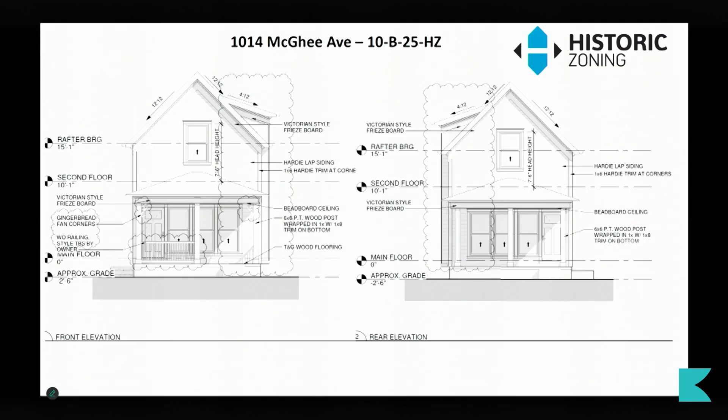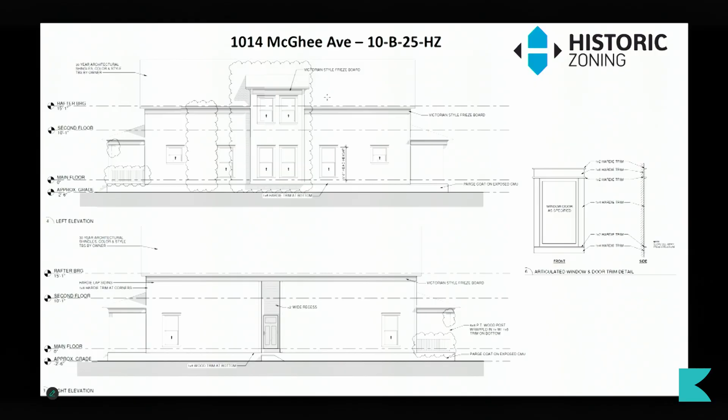Our first case today is for a new 2-story duplex on a 25-foot wide lot on McGhee Avenue in Mechanicsville. The shotgun-style duplex has porches on the front and rear elevations that serve as entrances to each unit. I want to note that what is labeled as the left elevation on the plans is actually the right side of the building if you were looking at it from the front, but I will use the labels on the plans for this discussion. This case was postponed at the October meeting to allow the applicant to revise the plans, particularly the left/west elevation. The siding-clad faux chimney on the left/west elevation has been removed, and the shed roof massing has been revised to a 2-story projection. The front setback was increased by 4 feet, and Victorian-style decorative brackets were added to the corners of the 2 front porch posts.

This is a middle housing project which must follow additional design standards, and a review occurs during permitting. The Commission's review focuses on how the project meets the design guidelines, but some elements of middle housing review may trigger site plan and building elevation revisions that would require additional review by the Commission.

The 25-foot wide lot previously featured a single-story, modest folk Victorian-style shotgun house with a width, depth, form, and roofline comparable to the proposed duplex. Its form and proportions are appropriate for the relatively modest housing stock along the block, and the Victorian-style porch brackets and friezeboard contribute detail compatible with the historic architecture.

However, as recommended by the guidelines, new construction in the overlay in the last 20 years has been more elaborate in style and detail, including recent new construction on Cansler Avenue, a block with similar housing stock.

The average setback of the block face is 24 feet 5 inches. The adjacent house is the closest to the front lot line along the block face and features a 16-foot setback, with the front porch at 10 feet.

It should be noted that there is likely a discrepancy in the lot boundaries in KGIS that resulted in an average front setback calculation approximately 5 feet larger than the actual measurements, which can be rectified during permitting.

The proposed 19.5-foot front setback with the front porch at 11.5 feet aligns with the block face and is appropriate. You can see the site plan overlaid here for that.

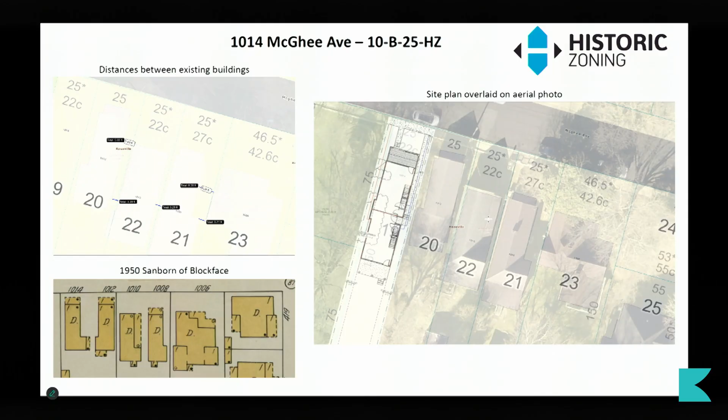The duplex is proposed to be centered between the side lot lines with a 4-foot side setback for both sides of the main body of the house, and a 3-foot side setback on the left-west elevation for the 2-story massing.

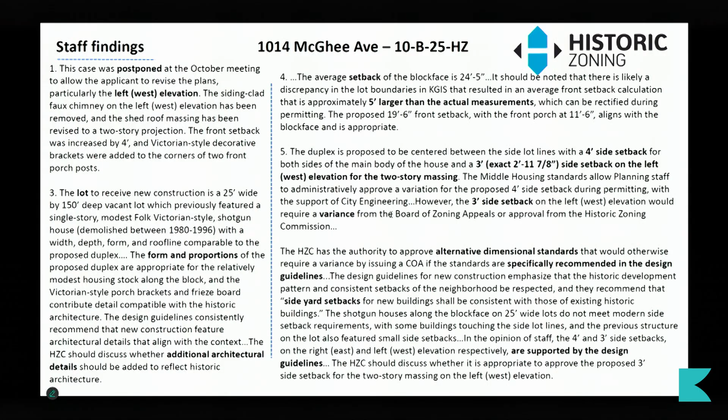The middle housing standards allow planning staff to administratively approve a variation for the proposed 4-foot side setback during permitting, with the support of city engineering.

However, the 3-foot side setback on the left elevation would require a variance from the Board of Zoning Appeals or approval from the Historic Zoning Commission. The Commission has the authority to approve alternative dimensional standards that would otherwise require a variance by issuing a COA if the standards are specifically recommended in the design guidelines.

The design guidelines for new construction emphasize that the historic development pattern and consistent setbacks of the neighborhood be respected, and they recommend that side yard setbacks for new buildings shall be consistent with those of existing historic buildings.

The shotgun houses along the block face on these 25-foot wide lots do not meet modern setback requirements, with some buildings even touching the side lot lines, and the previous structure on the lot also featured small side setbacks.

The left-west lot line is shared with the old Mechanicsville Park, which reduces concern about the effect of a smaller side setback, but makes this elevation highly visible.

In the opinion of staff, the 4-foot and 3-foot side setbacks on the right and left elevation respectively are supported by the guidelines. In the opinion of city engineering and zoning, the reduced setbacks would not pose a safety issue, although a higher rated firewall may be required to meet building codes.

The Commission should discuss whether it is appropriate to approve the proposed 3-foot side setback for the 2-story massing on the left elevation.

Guidelines recommend avoiding new construction that varies in height, so that new buildings are equal to the average height of existing buildings. The block features 1-story houses, so the duplex would be the only 2-story building on the block.

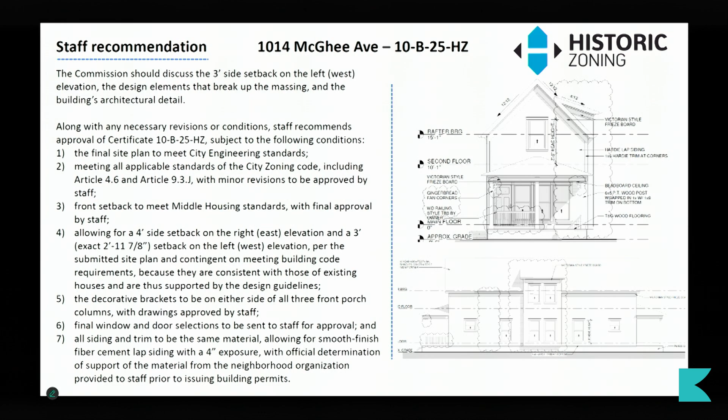Any context with that, Melinda? Context for changing the setbacks, the side setback specifically? Yeah. So section 8.5C of the zoning code allows the Historic Zoning Commission to use alternative dimensional standards if they are specifically recommended by the design guidelines.

The design guidelines do speak to side setbacks. One second, let me find where I have this written down. The design guidelines for new construction emphasize that the historic development pattern and consistent setbacks of the neighborhood be respected, and they recommend that, quote, side yard setbacks for new buildings shall be consistent with those of existing historic buildings.

So as you can see here, the historic buildings here are not meeting the 5-foot setback requirements. You can see that on this old Sanborn as well. And so in the opinion of staff, the design guidelines do specifically speak to this, and the historic context of the block speaks to this as well. The spacing between these buildings is very small, like 3 foot between these two. So having that spacing would be consistent with the block, and the side that'll have the smaller side setback is touching the old Mechanicsville Park, so there's less concern about neighbors there.

Again, as I mentioned, this is a middle housing project, so 4-foot side setbacks could be approved during permitting by planning staff with the support of engineering if the commission was uncomfortable with approving those setbacks. There was discussion at the last meeting, though, that this 3-foot side setback would be necessary to make this massing a 2-story projection. Previously, it was flush with the building, and there was a faux chimney here that the commission requested be removed. They've removed that and made this massing.

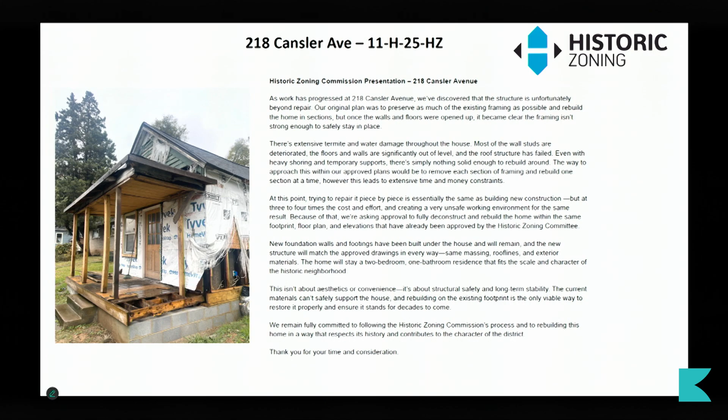According to the project's contractor, the damaged structure is currently a safety hazard that puts workers at risk, and pictures documenting water and termite damage were provided.

The guidelines state that demolition of any original feature or part of a historic building should be avoided, and that demolition of any building which contributes to the historic or architectural significance of the Old Mechanicsville neighborhood should not occur unless public health and safety require the removal of the building or structure.

In the opinion of staff, the documentation demonstrates that the structure is a safety hazard, and deconstruction and reconstruction following the plans approved with 11-D-24-HZ is appropriate.

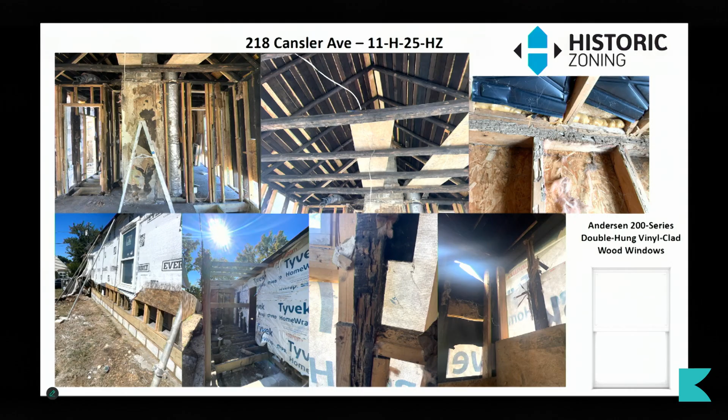However, no mechanical demolition, to include the use of excavators, wrecking balls, or bulldozers, should be undertaken, but mechanical equipment can still be used to disassemble the structure. Every effort should be made to reuse any salvageable historic materials, in particular the timbers that frame the roof.

Any other deviations from 11-D-24-HZ will require additional review by the Commission.

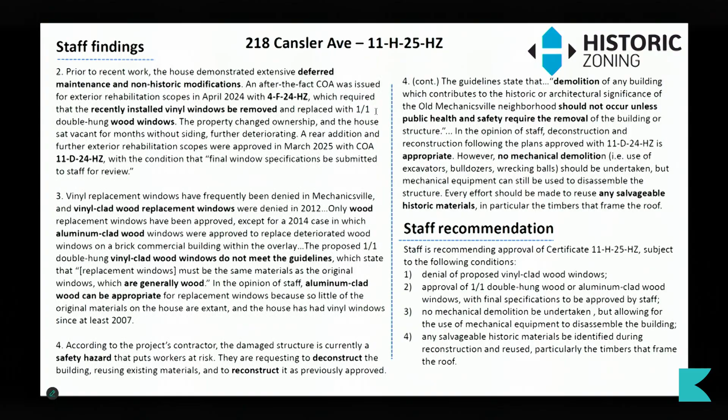Staff is recommending approval of Certificate 11-H-25-HZ subject to the following conditions: denial of the proposed vinyl-clad wood windows, approval of 1/1 double-hung wood or aluminum-clad wood windows with final specifications to be approved by staff, no mechanical demolition be undertaken but allowing for the use of mechanical equipment to disassemble the building, and any salvageable materials be identified during reconstruction and reused, particularly the timbers that frame the roof.

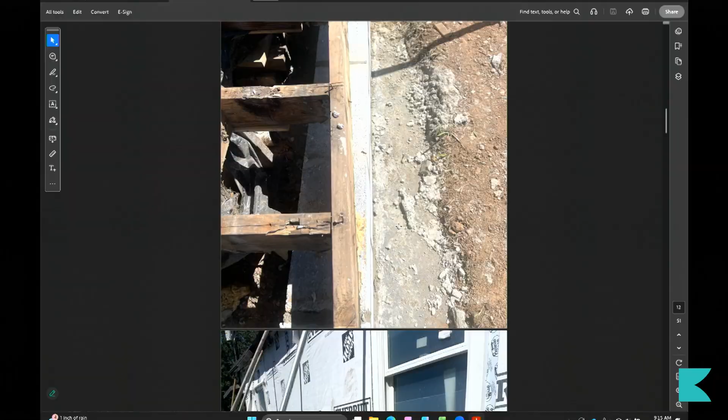What I was going to say back on the conversation of framing is all the old lumber has been there, but it's all balloon framed, with nothing attached at the bottom, which is why we had to add a lot of the lumber around the foundation just to be able to jack up the house. So that's all new for the most part. And then the newer framing that you see, when Corey purchased it, some contractor came in here and clad all of this. There's brand new drywall, brand new flooring, everything.

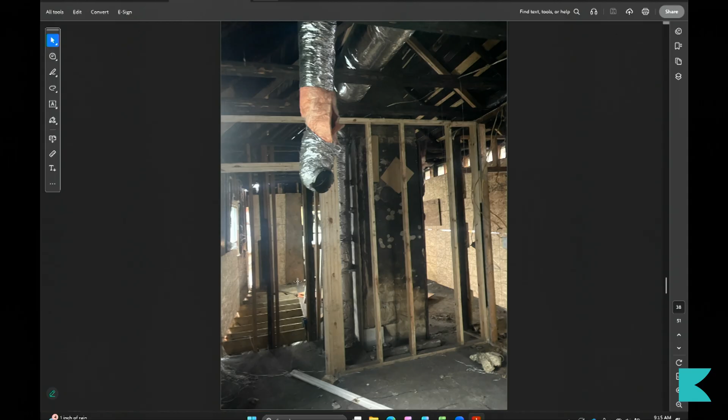We just ripped it off. So everything that's exposed, that newer looking framing, is something that they did, but it's so out of level that the ceilings look like this. So I just wanted to contribute back to the framing conversation so you have the context on that. So all that is what the previous contractor had done that we've just uncovered.

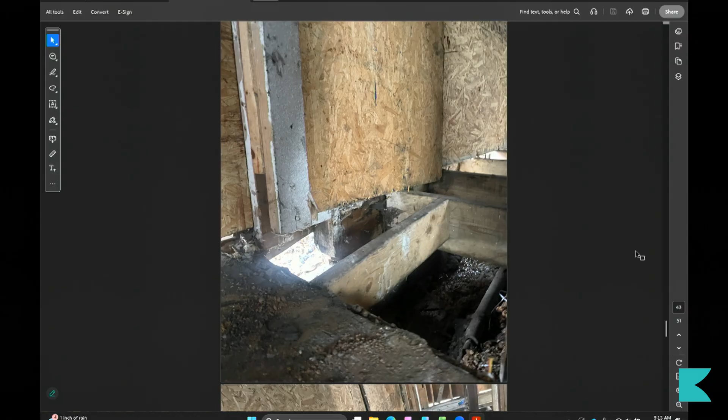Can you repeat the next question that you had? Yeah, I wanted to know if you were going to retain the band board and floor joists and studs that we can see that look a little newer, or is that part of the...

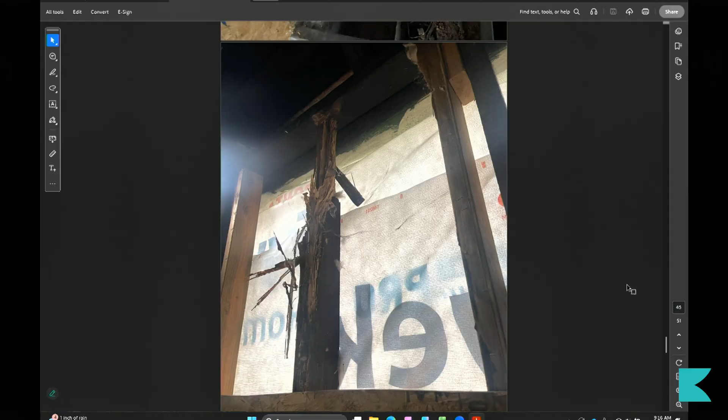So the two worst parts of the framing of this are: the termite damage in the old lumber is so bad that you can take the walls and do this to them, and they're not actually attached to anything, which is why the guys who did the foundation added a little bit of lumber just to be able to lift up the house to build the footers and walls.

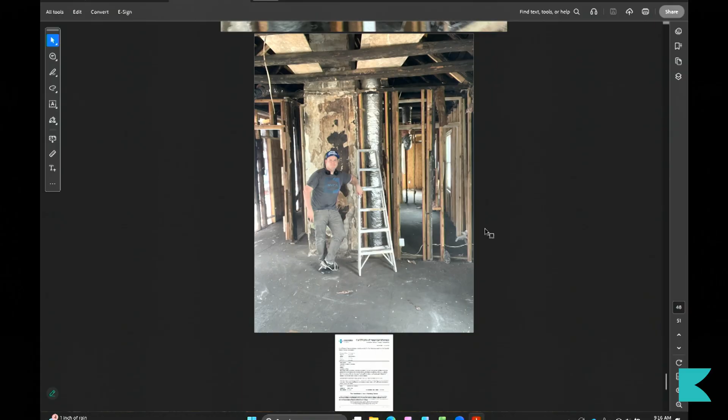And then the newer framing from the previous contractor, which is kind of the stuff that you see there where it looks like it's a few years old, but it's been aged by weather, it's not worse than the old lumber, but nothing that they have done is straight. It's not done properly. It's not holding anything up. It's not attaching - it's on the subfloor and it's not actually tying into anything. So none of it is right, and everything is out of level.

So for this to be structurally sound, the original plan based on what had been approved was to disassemble one wall at a time and rebuild it properly, which is the exact same thing as new construction, but just doing it one piece at a time, which is a lot more dangerous and cost prohibitive. So the goal is not to save any of the framing that the previous contractor did because it's all wrong. If we can save anything, the timbers in the roof are the strongest. The wall framing is not strong at all.

It has termite damage really badly. That's newer lumber that also has termite damage, which will not be saved. So the strongest component of this house that remains is the timbers in the roof. However, nothing's level, so the whole roof is really wavy, which has caused the whole back of the roof to be falling in. So any way that we can save those, if you guys have recommendations of how they can be repurposed or a way that still provides suitable housing, even if they're not visible, I think we'd be open to understanding how you see those being reused in the house.

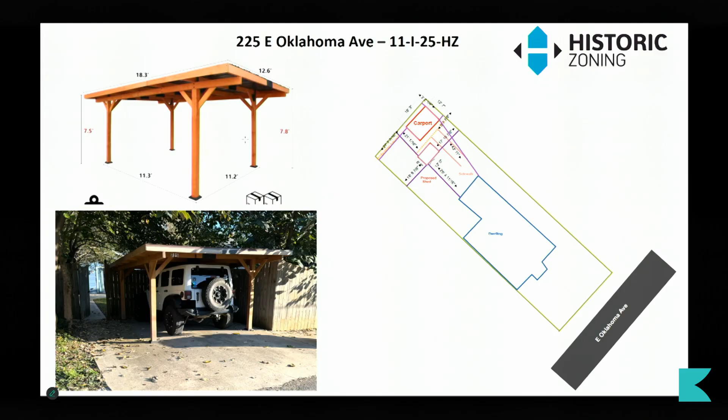This case is for an after-the-fact review of a new secondary structure. A shed was approved on the property last month, and it was identified during permitting that this carport was built without a permit or a COA sometime in 2024. The carport is placed at the rear of the lot and is accessed via the alley, and it is made from thick pine posts with brackets and a flat metal roof. The carport is not visible at all from the right-of-way and is screened by a fence.

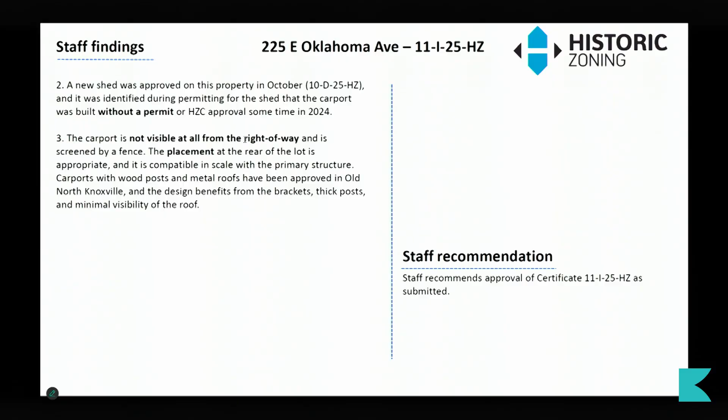The placement at the rear of the lot is appropriate, and it is compatible in scale with the primary structure. Carports with wood posts and metal roofs have been approved in Old North Knoxville, and the design benefits from the brackets, thick posts, and minimal visibility of the roof. So with that, staff is recommending approval of Certificate 11-I-25-HZ as submitted.

Thank you. I think the applicant is on Zoom, maybe?

Hello, my name is Fatima Al-Azhari at 2701 Eugenia Avenue, Nashville, Tennessee, 37211. I have nothing to add.

Okay, thank you. I think we have the neighborhood rep also on Zoom. Would you like to make a comment? Yes, Sean Boland, 115 East Scott Avenue, representing Old North Knoxville.

So carports are not allowed per our guidelines, and I'm unaware of any carport that's been approved. When approaching the board, we all agree that we would never have supported this to begin with. That being said, it is not visible from the public right-of-way at all. We are hesitant to support anything that deviates from our guidelines, especially when they can be perceived as precedent setting. So we do not support this application, but we are hesitant to recommend or request its removal. I'm happy to answer any of your questions because I was somewhat vague there.

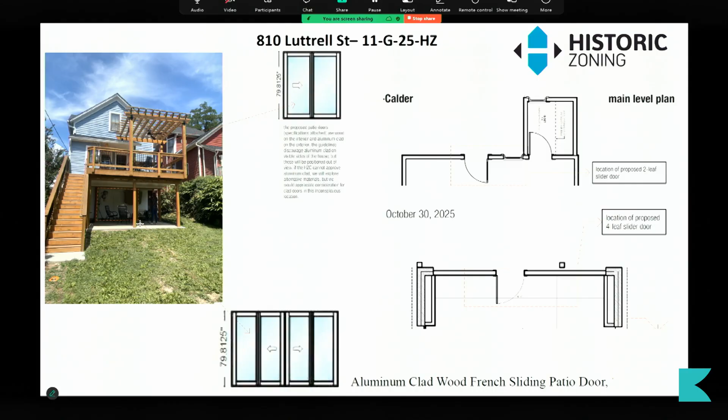Our first case in 4th and Gill is for 2 door replacements on the rear elevation. 2 existing single doors will be removed and replaced with aluminum-clad wood sliding full-light doors with 4-leaf and 2-leaf profiles on the 1st and 2nd story, respectively. Repairs to the brick foundation and installation of foundation drains were approved administratively on November 6th. The existing doors on the rear elevation are simple and not original to the structure, although their location might be. Removal is appropriate. The existing openings will be widened to allow for the doors, and in-kind wood trim to the existing should be installed around the openings.

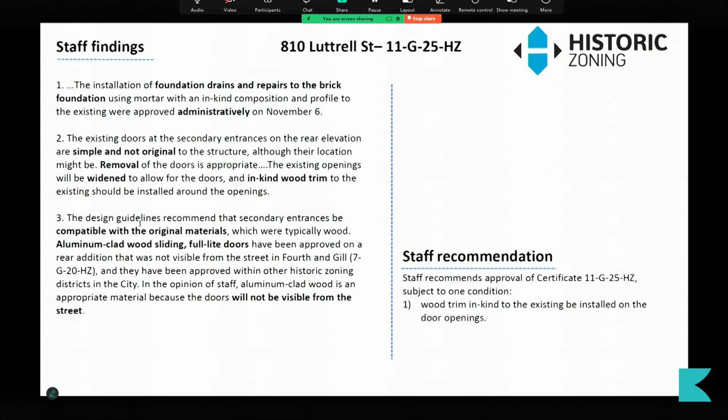The design guidelines recommend that secondary entrances be compatible with the original materials, which were typically wood. Aluminum-clad wood sliding full-light doors have been approved on a rear addition not visible from the street in 4th and Gill, and they've been approved within other historic zoning districts in the city. In the opinion of staff, aluminum-clad wood is appropriate because the doors won't be visible from the street. Staff is recommending approval of Certificate 11-G-25-HZ, subject to the condition that wood trim in kind to the existing be installed on the door openings.

Thank you. We have the applicant before us. Could you say your name and address, and let us know if you have any comments based on the staff recommendation? Yes, Sarah Martin, 800 Luttrell Street.

I agree with the staff recommendation about replicating the casing. The door casing will be the same profile that we have on existing openings on the back of the house, so that will match. With regards to the aluminum clad, we don't typically propose that in this neighborhood because we prefer a paintable substrate, either fiberglass clad or wood. But the reason we did propose it here is because it's a pretty big cost difference for the owner, a savings compared to other materials given the size of the doors. And since much of the trim on the house is white and aluminum clad comes in several options of white, we thought it would be a good match for this particular house.

Is the neighborhood rep available, or did they leave any comments? I did not receive any comments, and I don't believe they are here. Okay, commissioners, did you have any questions or concerns?

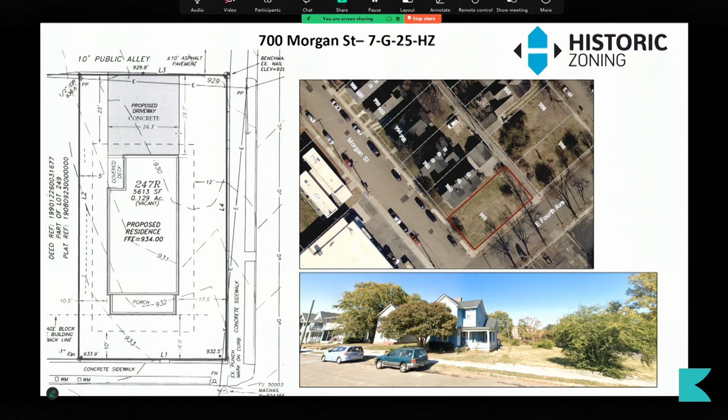The proposed parking is a concrete pad at the rear of the lot, accessed via the alley, which meets the guidelines. The 26-foot wide by 57.5-foot deep 2-story house is proposed for a block featuring 2-story houses in vernacular, Queen Anne, and Craftsman styles. The opposite side of the street features a historic brick apartment building, contemporary new construction, and a cinder block commercial building outside of the overlay.

The proposed 2-story house employs the American four-square style, including typical roof forms, brick veneer cladding, and a 3-bay facade. Overall, the house's style is compatible with the context and uses contemporary materials to be sufficiently differentiated from original buildings. However, additional architectural details and elaborations may be necessary on the side and rear elevations to align with the context.

The proposed 8/12 pitch hipped roof with a hipped roof dormer on the facade and overhanging eaves is comparable in height and complexity to other houses on the street. The roofing material is not specified but appears to be asphalt shingles and should be indicated on the final drawings.

The facade features a full-length wraparound 6-foot-8 deep front porch with 8-inch square columns, accessed via full-length brick steps. The wraparound porch is similar to that of the previous structure on the site and provides additional interest to the right elevation. The tongue and groove flooring is appropriate, and the final drawing should include a hand railing if required by code, ideally a wood hand railing with balusters set in the top and bottom rails.

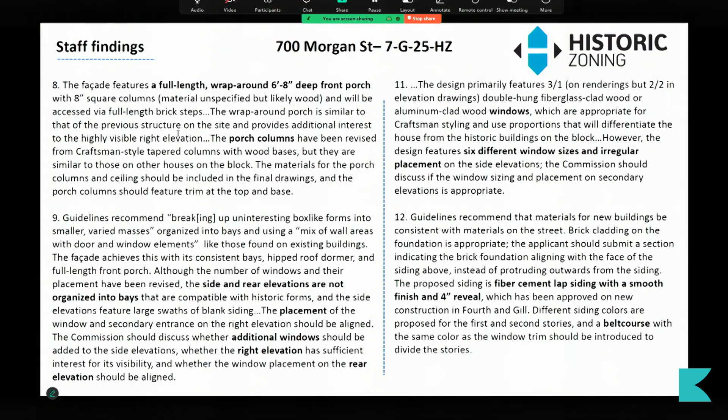The porch columns have been revised from the previous Craftsman style tapered columns with wood bases, but are similar to other houses on the block. The materials for the porch columns and ceilings should be included in the final drawings, and the porch columns should feature trim at the top and base as depicted.

Guidelines recommend that materials for new buildings be consistent with the materials on the street. Brick cladding on the foundation is appropriate. The applicant should submit a section indicating that the foundation aligns with the face of the siding above instead of protruding outwards, with final drawings showing foundation height.

The proposed siding is fiber cement lap siding with a smooth finish and 4-inch reveal, which has been approved on new construction in Fourth and Gill. Different siding colors are proposed for the first and second stories, and a belt course with the same color as the window trim should be introduced to divide the stories.

The proposed quarter-light Craftsman-style wooden front door is appropriate. Final door selections for the full-light secondary entrances should be sent to staff for review.

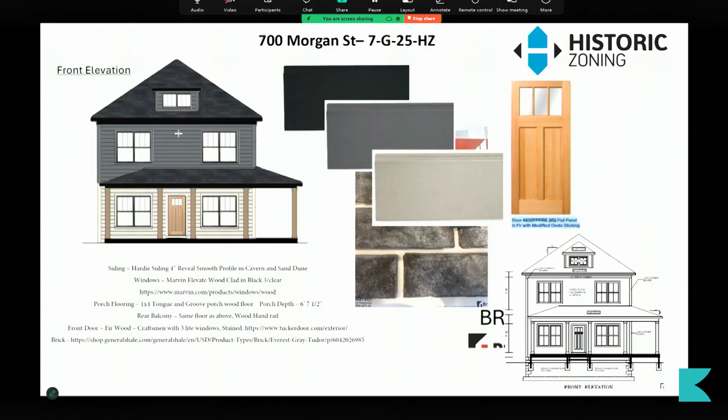Guidelines recommend breaking up uninteresting box-like forms into smaller varied masses organized into bays, using a mix of wall areas with door and window elements like those found on existing buildings. The facade achieves this with its consistent bays, hipped roof dormer, and full-length front porch. Although the number of windows and their placement has been revised, the side and rear elevations are not organized into bays compatible with historic forms, and the side elevations feature large swaths of blank siding.

The placement of the window and secondary entrance on the right elevation should be aligned. The design primarily features 3/1 double-hung fiberglass-clad wood or aluminum-clad wood windows, which are appropriate for Craftsman styling. However, 6 different window sizes are proposed.

The Commission should discuss the front and corner side setbacks, window placement and sizing on the side and rear elevations, and whether additional detail is necessary on the side elevations.

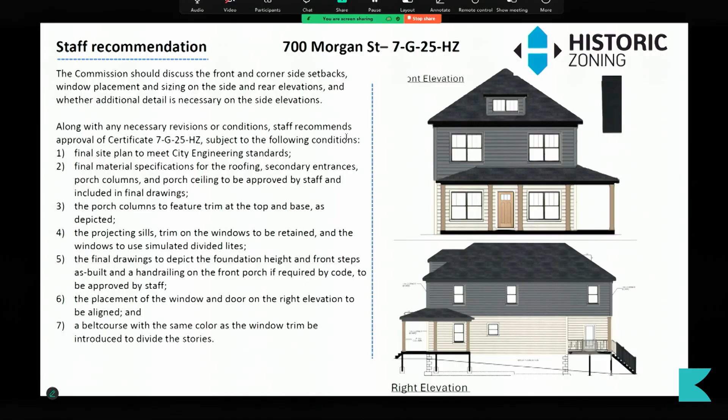Along with any necessary revisions or conditions, staff is recommending approval of Certificate 7G25HZ, subject to the following conditions: the final site plan to meet city engineering standards; final material specifications for the roofing, secondary entrances, porch columns, and porch ceiling to be approved by staff and included in final drawings; the porch columns to feature trim at the top and base as depicted; the projecting sills trim on the windows to be retained, and the windows to use simulated divided lites; the final drawings to depict the foundation height and front steps as built, and a hand railing on the front porch if required by code to be approved by staff; the placement of the window and door on the right elevation to be aligned; and a belt course with the same color as the window trim to be introduced to divide the stories. Thank you, Melinda.

Zach Taylor, 12404 Hickory Creek Road. I would like to say the site plan - our surveyor and engineer is still working on that to get it correct, because it doesn't have the wraparound porch. So with those setbacks, we will have to scoot the house over to get that where the side porch goes out around 8 feet.

We'll have to kind of make that up so we're within the setback lines for building purposes. The house is going to be flipped, so the covered deck will be on the street side and not beside the neighbors. Did you have any other comments based on staff recommendation? No.

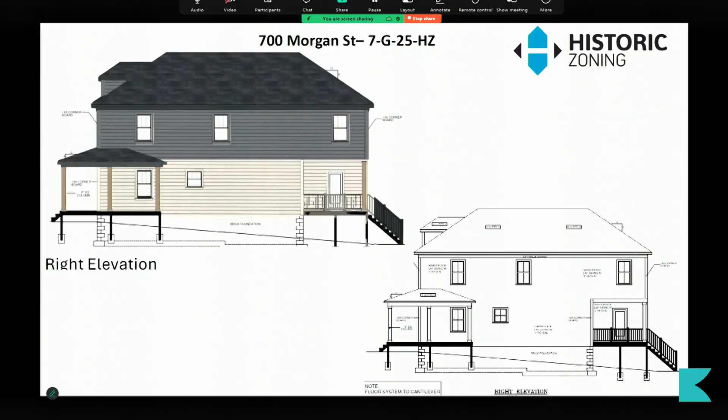Thank you. You don't have a specific dimension, 5, 6 feet, 4 feet? Are you proposing a handrail for the front porch? I think the lot falls approximately 4 feet over the elevation distance of the home. The front porch will be within the 30-inch range, which would not require handrails. The back, a little inset porch, will be at an elevation that will require handrails. So the stairs and the banister railing along the deck will require handrail. Thanks, I appreciate that. Yes, sir.

Absolutely. Commissioners, feel free to correct me if I'm wrong about the prescription of color—we certainly can't tell you what color to paint the door, even if y'all have a preference. I would agree, because as a design element it can be changed very easily, and we're looking at the long term.

The design guidelines recommend that the materials used for new buildings be consistent with existing historic building materials along the street. It's common that when people use masonry, we request they send specifications for us to review, just to make sure it's not super thin, to ensure it's still going to look historic.

That to some extent does give y'all purview over the type of brick, to ensure it's consistent with the street. So if in y'all's opinion consistent with the street means something more clay-based, that could be added as a condition. But the siding color, for example, isn't really within y'all's purview.

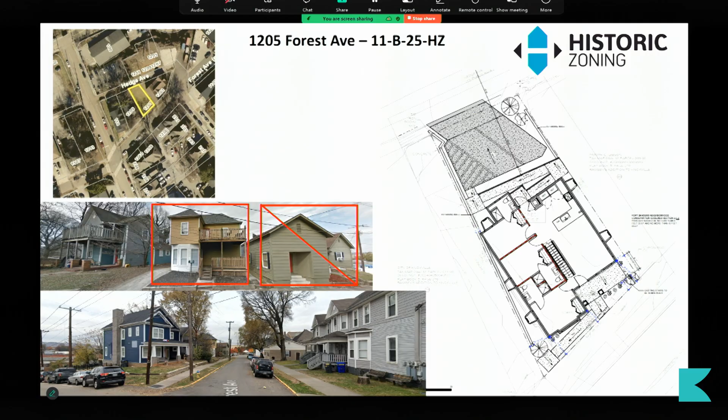That would be made from, quote, concrete. Design guidelines discourage the use of cinder block and encourage that retaining walls be made from, quote, low square cut stone, poured concrete, or brick. The retaining wall should be made from poured concrete or be finished with another recommended material.

The cross gable roof features an 8/12 pitch side gable and a 17/12 pitch front gable. The form, pitch, and complexity align with the design guidelines.

Guidelines recommend that new construction, quote, provide porches with proportions and materials that complement pre-1940 housing, but recommendations for porch depth and projection vary, encouraging a minimum depth of 6 feet and 8 feet.

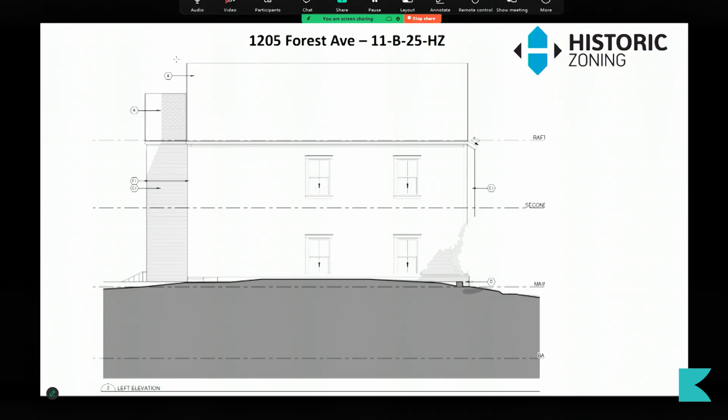The design includes a 6-foot, 1-inch deep concrete patio that goes through half of the facade, accessed via steps and a small access ramp, and half of this patio is covered to create a quarter-width, 2-story front porch recessed under a side gable roof that projects from the left bay.

The porch is supported by two 11-inch tapered square Tuscan order columns on each story that terminate in an architrave on the first story and a frieze on the second. The porch depth is close to the minimum recommended by the guidelines.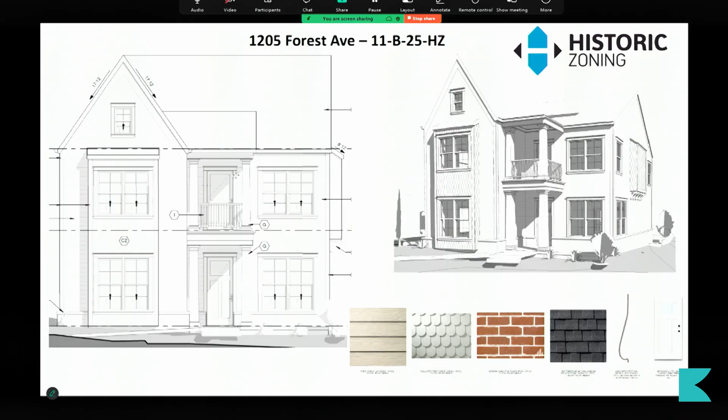Most of the historic houses in the area feature full-length or half-length covered front porches with supports compatible with and similar to the proposed Tuscan order columns. The board should discuss the porch depth and whether the first-story roof should be extended to cover all of the proposed patio.

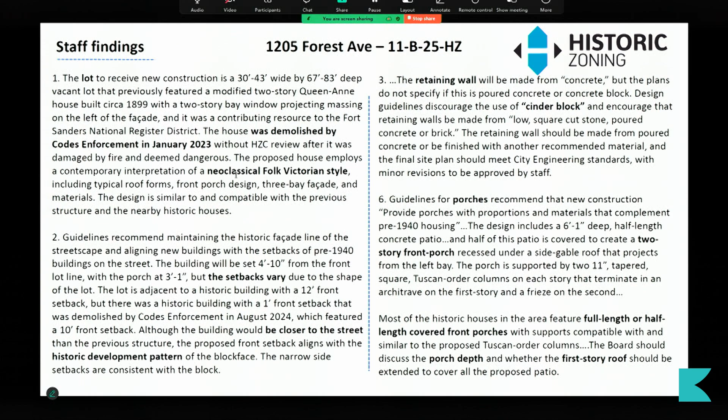The proposed fiber cement clapboard-style lap siding and scallop siding with corner boards, and the raised foundation clad in brick veneer, meet the design guidelines for materials.

Guidelines recommend that windows on new construction feature similar placement, proportions, and profiles to pre-1940 construction. The design employs 4/4 and 2/2 double-hung windows with trim and sills. The material is not specified, but no window materials are discouraged by the guidelines.

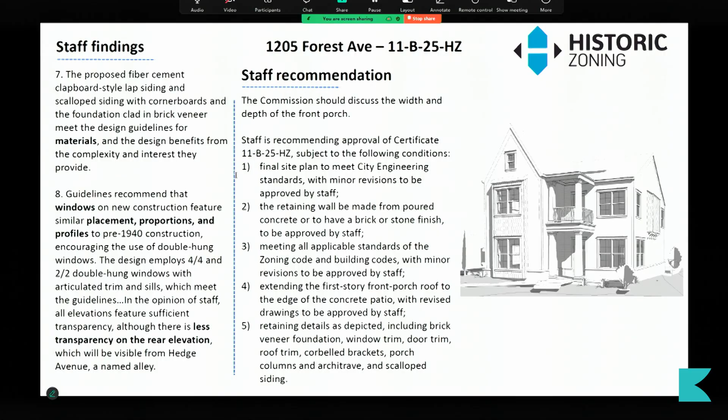In the opinion of staff, all elevations feature sufficient transparency and organized windows, although there is less transparency on the rear elevation, which will be visible from Hedge Avenue, a named alley.

The quartered light paneled door and half-light paneled door in the facade are compatible with historic styles, and the access ramp leading to the primary entrance is small in scale.

The full light door on the rear elevation, accessed via an access ramp, is not a historic form, but is clearly secondary in nature and is compatible with the context.

The Commission should discuss the width and depth of the front porch. Staff is recommending approval of Certificate 11B 25HZ subject to the following conditions: the final site plan to meet city engineering standards, with minor revisions to be approved by staff.

The retaining wall to be made from poured concrete or to have a brick or stone finish, approved by staff. Meeting all applicable standards of the zoning code and building codes with minor revisions approved by staff. Extending the first-story front porch roof to cover the edge of the concrete patio, with revised drawings approved by staff. Retaining details as depicted, including brick veneer foundation, window trim, door trim, roof trim, corbel brackets, porch columns and architrave, and scalloped siding.